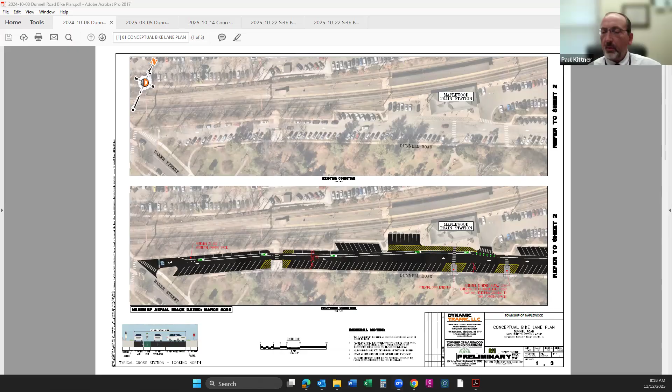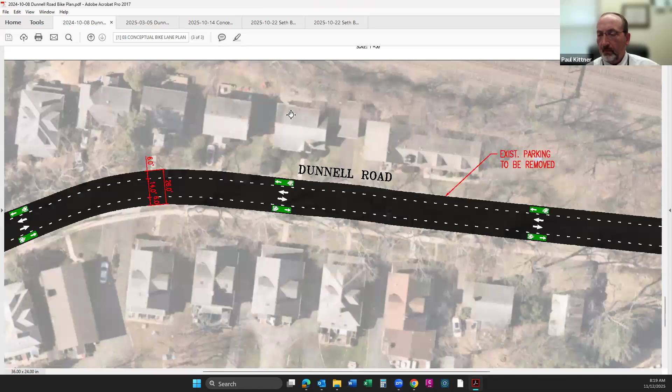Okay, here we go. So if there's a way we could zoom in on the proposed—maybe we can start where the Greenway ends at Jefferson. Maybe zoom back a little bit. Okay, so Dynamic had prepared these sketches.

What we're looking at is a bike lane that's defined, but it also encompasses the travel lane. This is not a typical type of striping situation. Pat can go into more detail, but the component of this is primarily the bike lane—this would not be, for example, a shared lane for walking. There is a sidewalk, not shown, on the easterly side of the road where we could enhance that and consider it part of the Greenway.

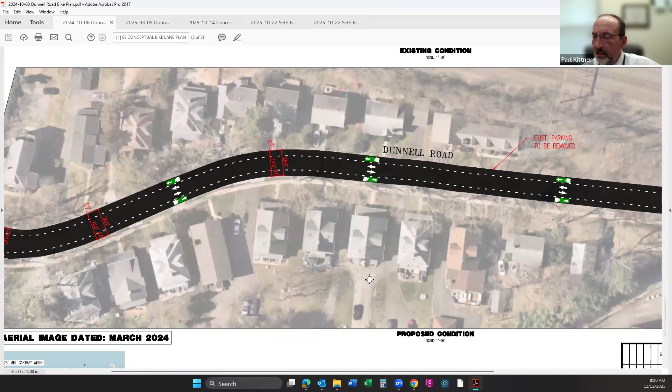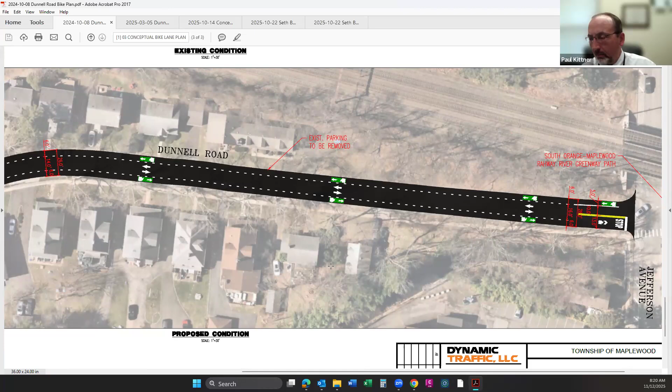Okay, we can enhance it. There's a number of ways to enhance that, but that's up for discussion, maybe at a later point. But the bike lane itself has two dedicated lanes, which would continue with the Greenway and continue this ability to bicycle. It's also worth noting we're in the middle of striping Parker Ave, which connects to Maplewood Ave, and our goal is to eventually connect an ability for a bicycle to get from Maplewood Ave down Jefferson and connect to this bike lane as well. So there's two different ways of doing it.

If you could flip to the next sheet, please.

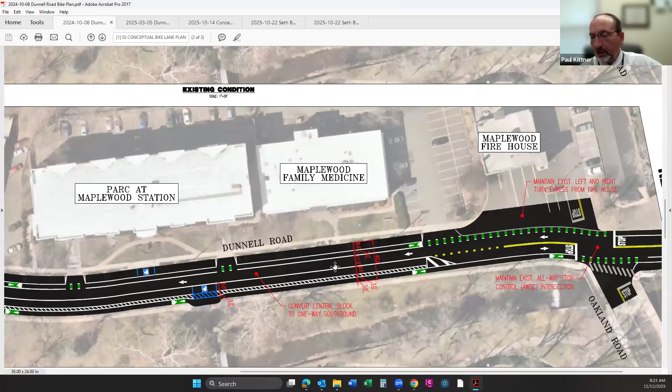So here at Oakland Road, what we're proposing is actually two-way circulation just at the intersection. That's to accommodate the firehouse station. We want the firehouse to be able to circulate in either direction from that location. But beyond that, traveling south, we're proposing a one-way circulation, towards the train station.

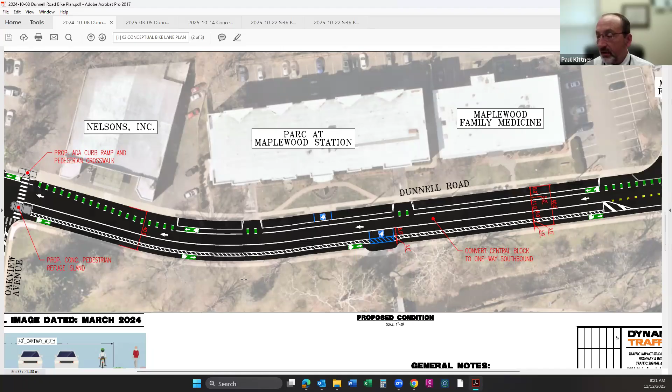Why are we doing this? Because there's no way to implement, with the road width that we have, two dedicated bike lanes while maintaining parking and the park facilities without making a significant impact to the park. So by eliminating one travel lane, we're introducing buffer areas and a dedicated bike lane, which would take up that space. This also promotes safer circulation.

Now you only have one way of traffic, and that would be consistent with the prior circulation pattern. So if you continue to Oakview, it's one way. Oakview to Baker is already one way. This is really the tricky part.

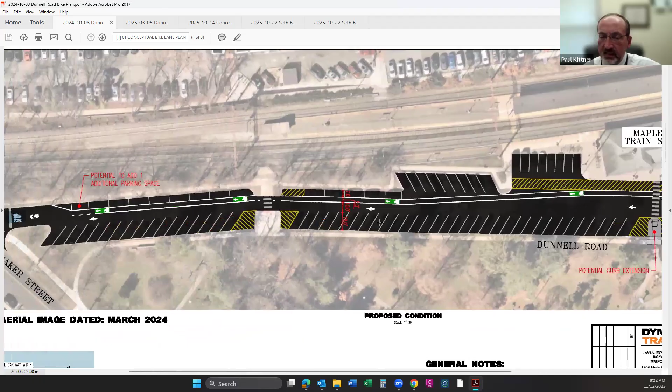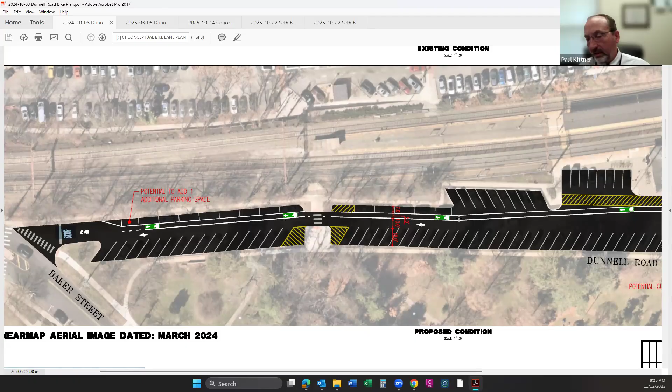The sketch right now shows a bike lane going in the southern direction. The problem is we haven't come up with a proper return going in the opposite direction for the bike lane. We have ideas, there's a number of ways we could do this. One consideration is to remove the 14 or 12 parallel parking spaces and shift that bike lane up against the curb, or introduce another bike lane.

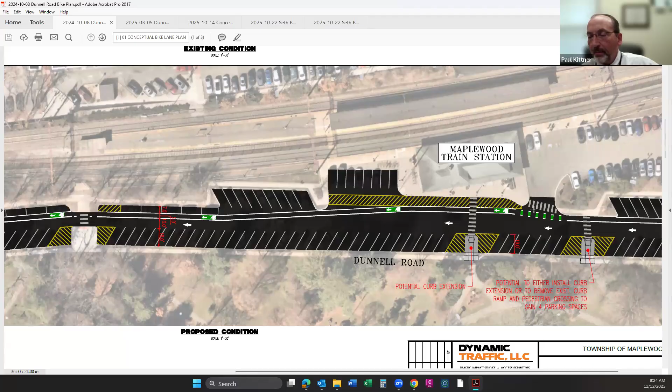So we have our traffic engineers, they might be able to provide some insight into that and explain that. But there is a second option that we have. Pat, is providing a two-way circulation bikeway possible if there's enough geometry in the road to accommodate the lane? I think going in the northern direction, it would be closest to the curb, so it would not be counter to the traffic flow. You'd have the buffer of the other lane.

Yeah, hi, good morning everybody. So yes, Paul, to answer your question, there are a number of alternatives we've come up with that could introduce a northbound bike facility, even though this block of the roadway is one-way southbound for vehicles only. To Ms. Adams' question, it's not a requirement since the block is one-way southbound for vehicles to begin with. So the plan you see here that only provides a southbound bike lane is a viable option.

We just wanted to present some other alternatives for what could be done to satisfy what is likely a demand that exists for northbound bicycle travel in this block as well, to reach the train station from Baker Street, even though vehicles can't necessarily do it. So it's not a requirement, but there are options that could be considered to provide it.

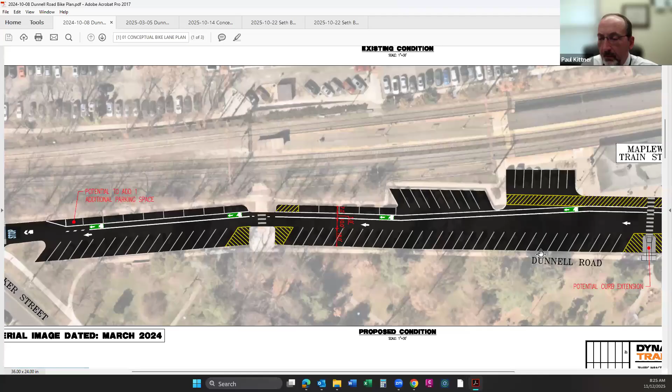So we did look at the option of encroaching into the park and widening the sidewalk. We actually looked at a number of ideas, and there is a potential for that, but the problem is we have a number of specimen trees along Dunnell in the park that really cannot be impacted. Mike could speak more to this on those trees, but they're significant historic trees. So we would have to be very careful if we were to shift either the curb or the sidewalk.

There is a possibility in certain locations where we could shift the curbing along Dunnell Road and basically shift that parking closer to the travelway. It's tight in the very beginning, closer to Baker Street, but as you go towards Oakview, the road actually widens. We just don't have a concept developed as of right now, but we can be sure to have that prepared for the next meeting.

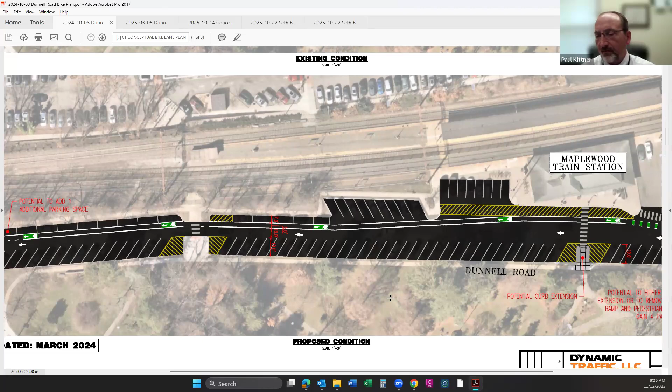We did walk the site, we did walk the park, and we were concerned with encroaching further closer to the trees with any curbing that could destroy root systems. So that's where we're at. I think we have to still refine this further, but this is, in my mind, the trickiest part.

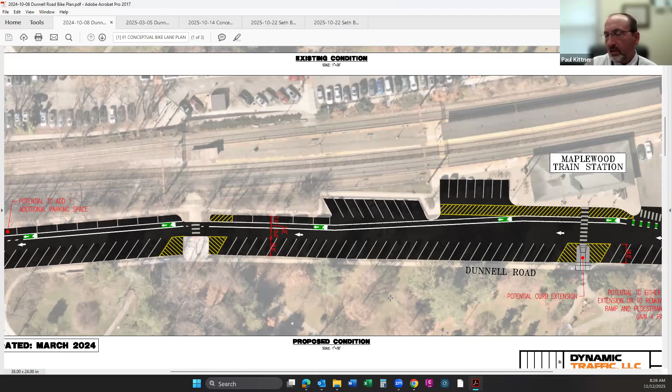All of this requires the section from Oakland to Oakview to be one way. And I think that's why our fire department official is on, to maybe voice some thoughts on that, if that's acceptable. So if we could just go back to that.

So Paul, just one other thing. The way you have it here, would people have access to the office parking lot here?

Two ways. If you came down Oakland, you can make a left there and then go into the parking lot of this office. Yes. Correct.

Deputy Chief, give us your thoughts on this section of Dunnell being one way. We also talked about making Jefferson one way going south towards the train station. Is that another option? Making Dunnell from Jefferson to Oakland one way? Yeah, we talked about that. There was a proposal or concept at one point. Is that still the only one I thought there was? This is new to me, the one way between Oakland and Oakview.

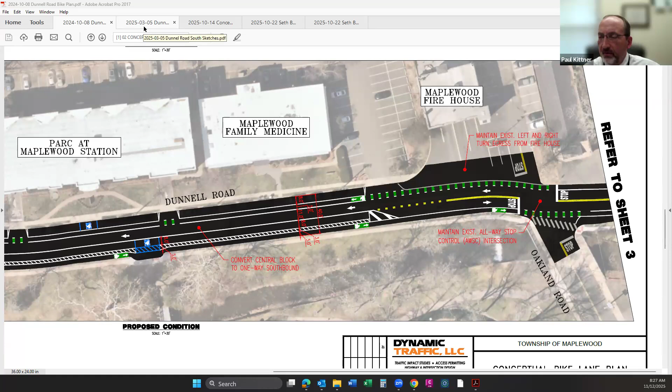Pat, I know you guys looked at this. Do you have any thoughts on Jefferson to Oakland Road, making it one way? Yeah, that was something we discussed very early on when we first started looking at this entire roadway. It was dismissed pretty clearly because we didn't want to cut off a route from the firehouse that currently exists. Right now there's easy northbound access from the firehouse to Jefferson. That would be eliminated under that scenario. So to avoid increasing response time, I think it was dismissed.

It makes, Deputy Chief, you have some thoughts? Good morning. Yeah, what Patrick just said, he explained it perfectly. Our main access to the upper part of Maplewood would be Jefferson, making the left out onto Jefferson and making our way up to the hillside. Making that a one way would obviously impede our access and increase response time.

As far as the front of the firehouse there, if it could stay two way, that would be really good for us. If you wanted it to be one way going towards the train station, that's fine, we'll still pull out and kind of go the wrong way a little bit onto Oakland Road if we have to. Having it two-way right there is not so critical to our operations because we can still go a little bit the wrong way onto Oakland. Yeah, it's kind of catty corner, but we can still go straight out. So if you wanted to make that one way, that's not a big concern for us.

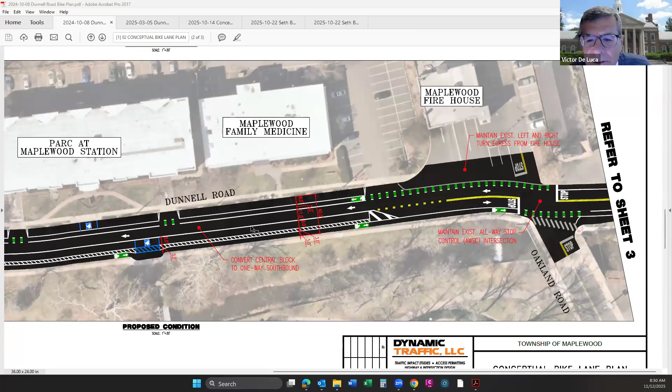Could you explain, I see we have the lane sizes, exactly what are we talking about between the firehouse and Oakland? Pat, Oakview, you want to talk, Mr. Downey? Yeah, so I can chime in on that.

So what we have here is one direction of vehicle travel in the center of the road where the white arrow is. That's the vehicle travel lane, southbound only, 11 feet wide. These individual dimensions could shift plus or minus, but in general this is just a conceptual layout. So we have that vehicle travel lane with the bike lane in the same southbound direction directly to its right, that's pretty typical. Then on the right side of the road, up against the mixed use development on the top, there's the parking lane, and to the left side there's also a parking lane. So while normally parallel parking is accessed to your right side as the driver, this one would be on your left, simply by nature of the road being one-way southbound. But since that parking existed and is high demand, we didn't want to impact that row of parking.

So that is maintained, just accessed from the opposite direction. And then the last thing you see at the bottom is the northbound bike lanes. In this block, unlike the southern block that Paul mentioned a moment ago, we do have sufficient width to maintain bidirectional cycle flow, even though vehicle travel is one way.

This is a little bit more critical lane in the sense that because it's going the opposite direction, or what we would call contraflow to the vehicles, it requires a little bit more safety enhancement. So that's why you see this direction has that buffer. It's a little bit less expected, perhaps, for a driver, for a cyclist to be going that way. It protects them from the doors of the vehicles, from that leftmost parking lane.

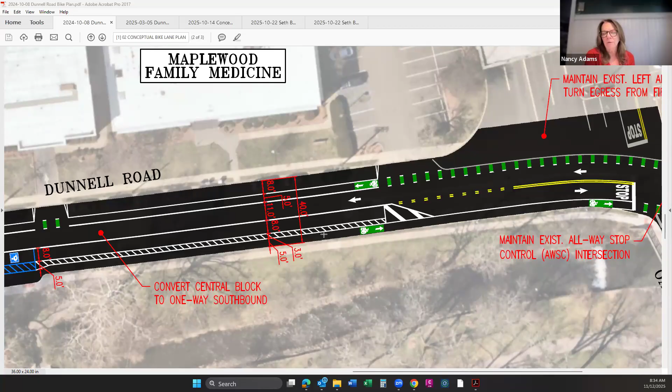So that protected lane with the bike coming the wrong direction is precisely what I was asking about on the other end, between Oakview and Baker. There, it's even less opportunity to protect it. But Mayor, to your point, that's one of the considerations when we make a final decision on how we orient these bike lanes. That should be considered.

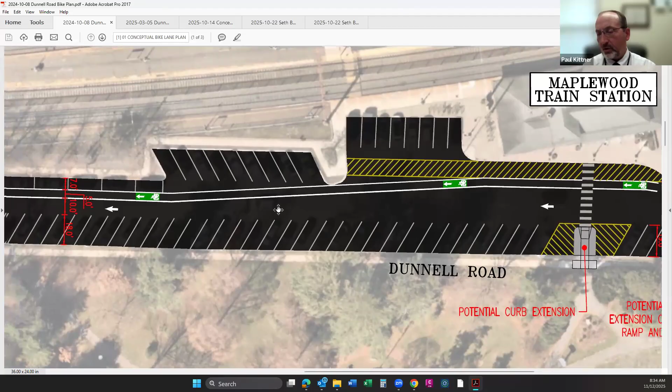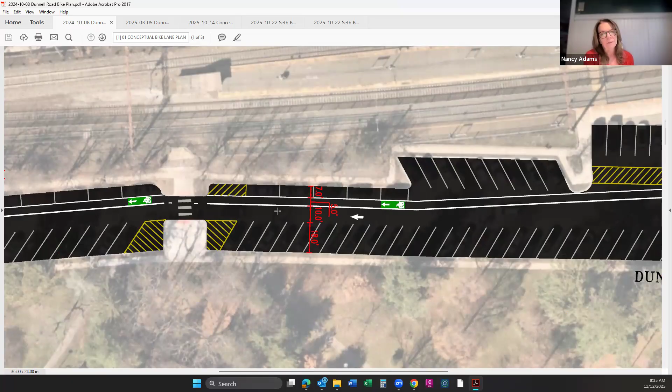Right, but losing parking over there, that's ginormous and problematic for a whole lot of reasons. Commuters, customers to the village, that's tough. I mentioned before the possibility of going into the park with an expanded walkway slash shared lane.

If we wanted to consider a wider sidewalk, Mr. Downey, how wide would that sidewalk have to be on the east side, along the park, to be shared? So for it to be a shared use path envisioned for cyclists going two ways on their bike at speed, concurrent with pedestrians on it, typically you would like to see at least a 10-foot shared use path. So about twice as wide as what's there currently.

There's also the potential for vehicle overhang to be considered, because there's that angled parking that comes up right to the curb. So the first 2 feet or so adjacent to that curb isn't really usable for what that 10-foot width would be, and there'd certainly be a grass strip anyway. Right, so you wouldn't be able to take credit for that grass strip in your 10 feet, so to speak. So it would be 10 feet moving closer toward the park.

If we used wheel stops there, can we take credit for it? Potentially, that's certainly an option to consider. There are maintenance considerations with those too, but yes, it's on the table.

Don't forget the historic park. You start taking part of the land, that's going to be an issue. That's another consideration, and that would take probably a big effort to do that. Ironically, it would take away the bike parking they just installed on the grass.

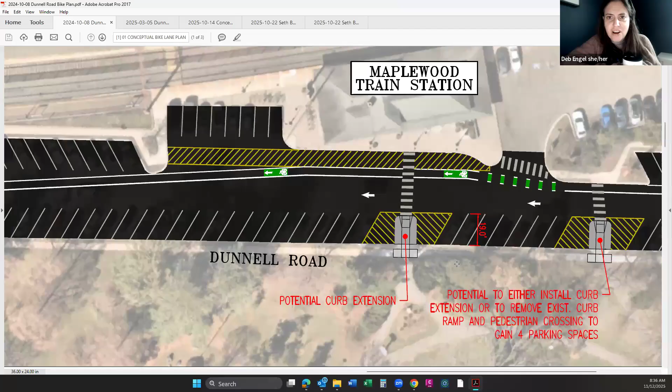Can you clarify a little bit, like which parking spots would go, and where they are, and how many?

Sure. So a couple of the different options we were kicking around would be those shared use paths on one side of the road or the other. That would be outside the current vehicle travel way, so that wouldn't impact parking.

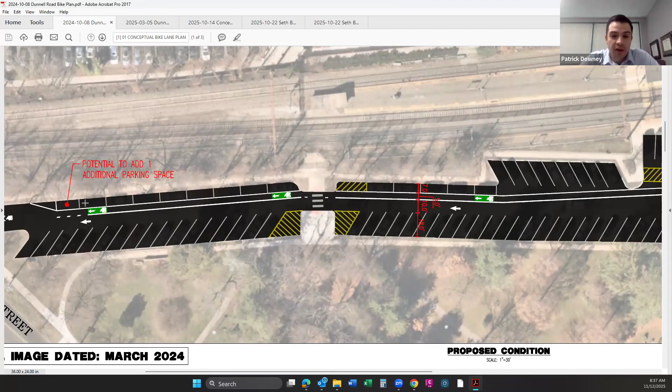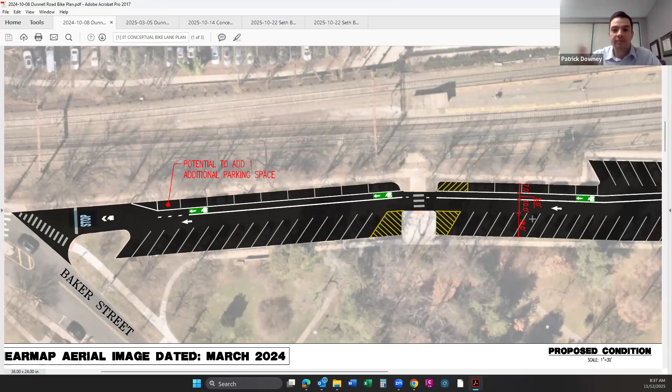However, the option that would keep it in the pavement would involve the 12 existing parallel parking spaces along the top of the page. Essentially, it would remove those, shifting the one bike lane you see closer to that direction into where that parking was, shifting the vehicle travel lane, the parking, everything to that side. So at the bottom of the page, you could put a protected northbound bike lane, similar to what you saw on the previous block.

And that would be along the curb, correct? Correct. And we have these curb extensions for the crosswalks to contend with—that would be in the way. So there would need to be modifications to those islands to allow the bikes to pass through.

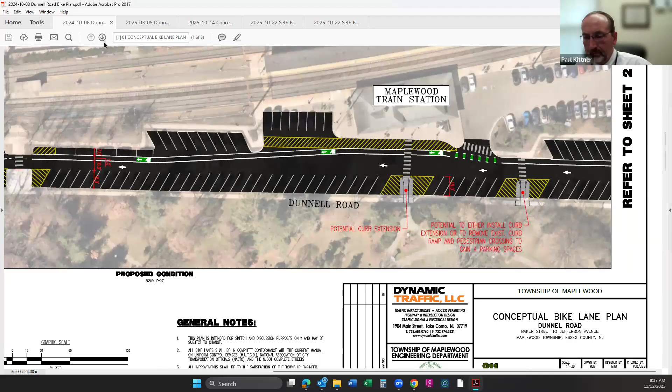So we'd be eliminating those parallel spots on the village side? Correct, yes, 12 spots.

That would mainly impact commuters, because in theory the village people don't park there to go shopping during the weekdays. We were looking at some other opportunities to maybe pick up a few spaces in other sections of this block. It would not be enough to offset that entire row, but the net loss would be something less than that total row.

Mr. Downey, if we were able to widen the sidewalk to a full 10 feet, is that also another consideration? I mean, that would keep the parking, right? We wouldn't impact the parking at all, and we could at least continue the bike lane in the northern direction.

Yeah, I mean if there's the ability to provide a two-way bike facility totally outside of the pavement, that's great—that's the most protected for cyclists. So that's definitely on the table, it's just a larger construction effort.

A lot of what we've seen, especially on the north block and the central block, was really just signing and striping—fairly inexpensive improvements. This is a real project.

If we were to install curb stops along that row of parking, then in theory we could take advantage of the grass strip, convert that to concrete. That would provide us a 6 to 7 foot wide sidewalk, and then we could go an extra 3 to 4 feet on the easterly end, widening it to a full 10 feet.

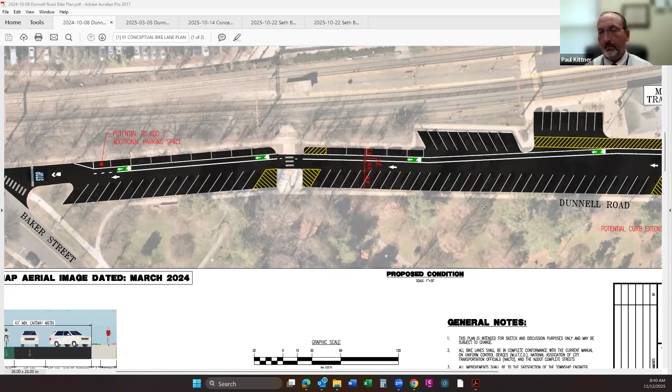Okay, so the major hangup here is from the train station south, correct? Yes. All right, so one option here is to phase this—figure out what we can do based on what we have and what's possible without a lot of construction work, and also the layers of approval once you start dealing with Memorial Park, so we might want to address this in phase 1, phase 2, because phase 1 can be done relatively quickly.

That requires parking changes by us and some redesign within curb to curb. That's correct, from Oakland to Oakview, you mean? Well, from Jefferson to the train station, essentially.

So we haven't talked about the reduction in parking on that section. But I don't think there is any, is there? Except on Jefferson, all the way at the end.

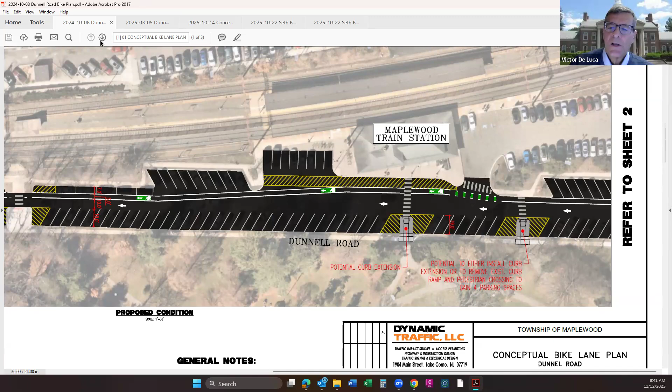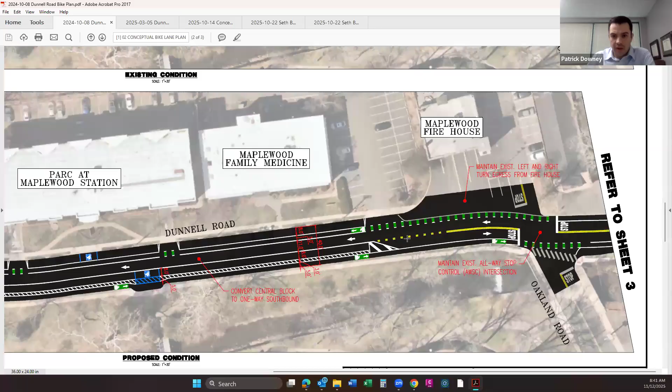No, I think there is—yeah, looks like it, so this northernmost block. One sheet further down, the next one, yeah.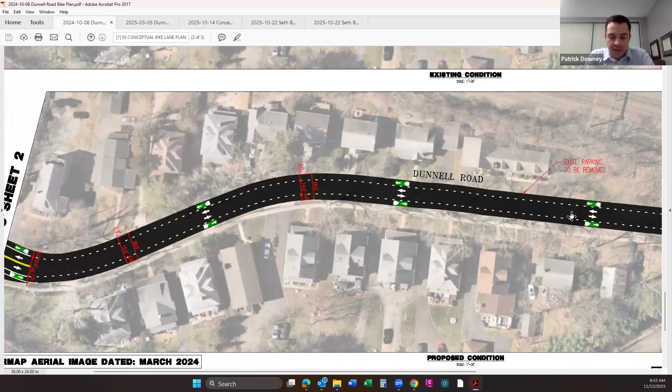So there's a mix of parking along one side of the road only here. The top side on this image, the southbound direction, has a mix of permit parking spaces and 2-hour parking spaces on school days, signed out there. So along the top side would be eliminated under this plan. And then there's commuter parking down at the corner of Jefferson and that first house. So how many spaces do we lose?

We don't have an itemized count because they're not individual spaces and there's driveways in there, so it's not a clean calculation. We could provide an estimated number, but I don't have that at the moment.

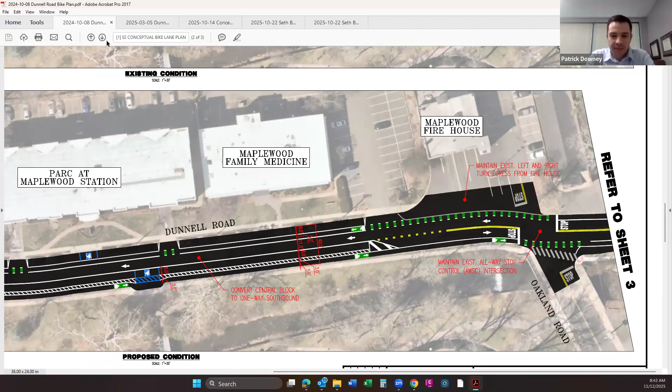Dave, can you go down to the corner of Jefferson there? So there's about 7 spots between that house and Jefferson that park on the train side. And those are commuters, permit commuter spots. So we would definitely lose those.

I just feel like it's worthwhile mentioning that if we make it safer for people to bike to the train station, less people might drive to the train station and need parking.

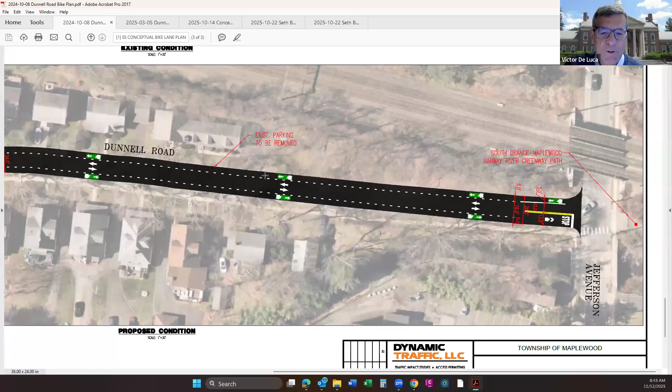So this section here, with the elimination of parking, there's enough road width to have 2 lanes with a bike lane on either side, correct? I'm gonna say yes to that with an asterisk.

So this has striped bike lanes along the 2 sides of the road. Because of the existing width of the road, which is fairly narrow, generally about 28 feet, and it actually pinches closer to 26 in some areas, there's not enough width to provide a center line down the road. So this is what's called advisory bike lanes, permitted by the FHWA as kind of a new trial basis measure.

It's akin to a good analogy, which is a residential street. When there's a residential street with parking on both sides, often what's left down the middle isn't enough for 2 cars to pass each other necessarily. The same would be true here. Instead of parked vehicles, it would be those bike lanes.

So in the scenario where vehicles are traveling both directions, one or both of them, assuming it's clear of bikes, will actually divert temporarily, partially into those bike lanes to pass each other, because there's only about a 16-foot section left down the middle. And this approach was approved through DOT, or is it under consideration?

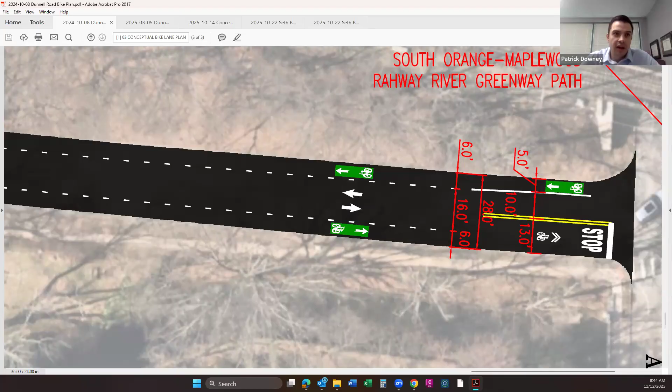Yeah, it's an approved measure. It hasn't quite made its way into the MUTCD, but it's well documented. It's been tried in other places, it seems pretty promising, it's just not fully adopted. It has restrictions along with it for speed and volume, to make sure you're not putting it in an inappropriate location, and this would be an appropriate location.

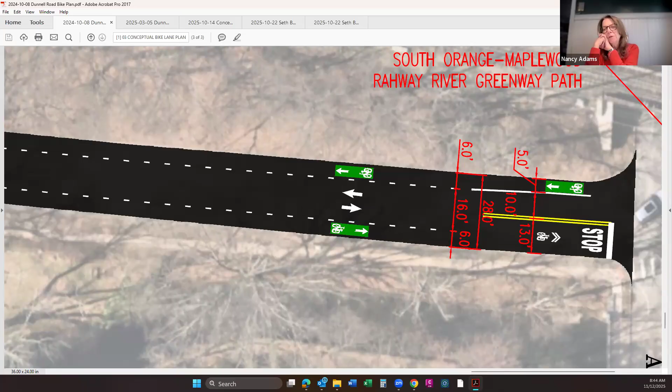It's sort of somewhere between a bike lane and no bike lanes at all, like sharrows, then this, then a full bike lane. Sharrows would be the alternative for a road of this width, and we think this is a little bit better because it puts a little more of the emphasis on the cyclist rather than on the vehicle.

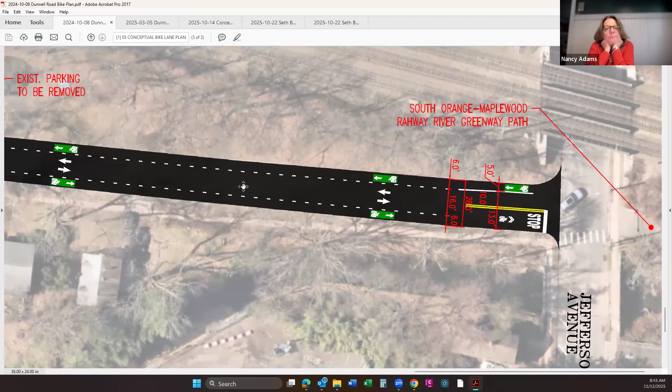So I would like to put forth that we focus on the area between Jefferson and the train station as the next leg. The reason being, as I mentioned before, it doesn't require construction outside the curbs.

It eliminates some commuter parking, some residential parking.

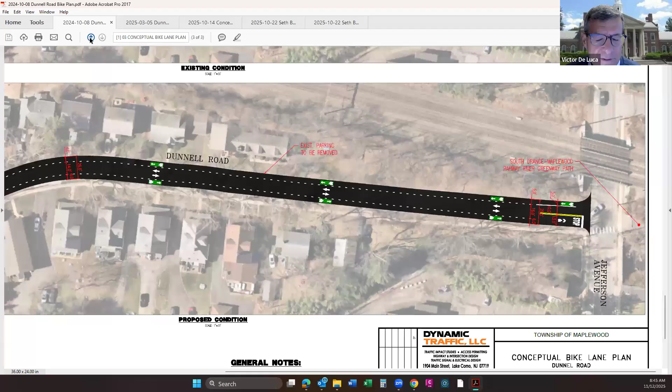And the way this design is now, if you go to the next slide Dave, it still allows access to that Maplewood Family Medicine office building there. It allows people to come out on Oakland, which is a signalized intersection with Valley, much safer than Jefferson. So I think this is a good design.

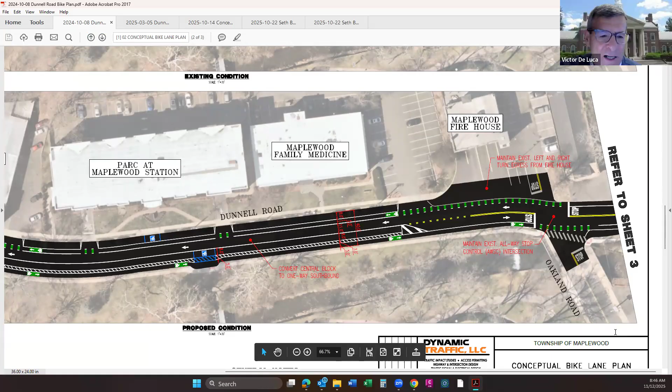The difficulty here is that the only access to the apartment building is to go around the block, past Maplewood, and Nelson's garage is the same thing. The only access to Nelson's will be coming down Dunnell.

And so there's a lot of buy-in here that we have to go out and get. I think there's enough work just to do this section, between the residents on Dunnell, the people who live in that apartment building, all those businesses that are in Nelson's.

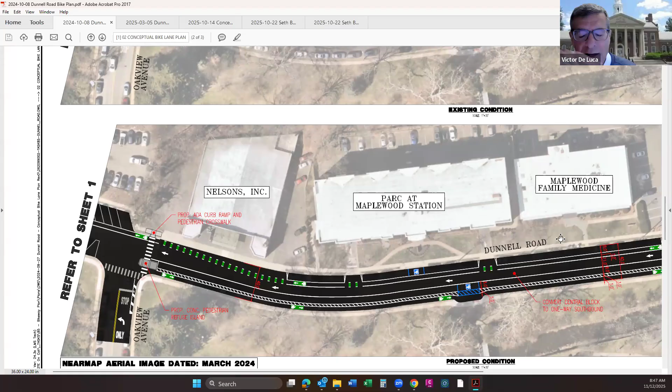Even the doctor's office there, because their clients are going to have to maneuver around to get into that office. And the Civic House with the Y. And the Civic House, yes, thank you.

Also, I thought when we asked Dynamic to look at traffic counts on Dunnell, it was between Oakland and Jefferson. I don't remember, did we do any of that analysis between Oakland and Oakview?

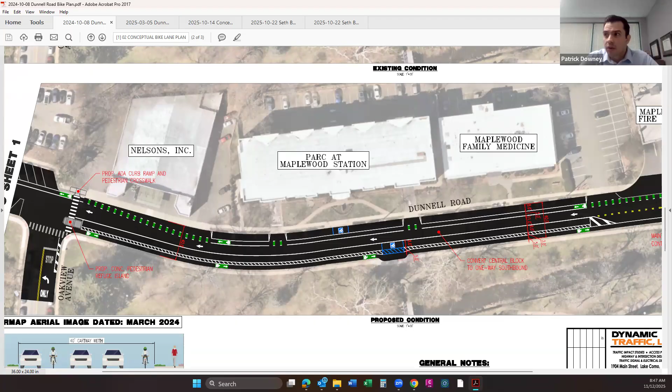So I could just chime in. We have a count at the intersection of Oakland and Dunnell, just off to the right of the page. What we were looking at was the northbound volume, essentially the volume that would be affected by this change, and it was fairly low. Peak hour volume was well under 100 peak hour vehicles, which is DOT's rough threshold for significance. So in terms of traffic impact of those redirected trips, it wouldn't really be perceptible on the adjacent roadway network. It's really going to just impact the people on this particular block.

What are the peak hours that you mentioned? Like what hours is that? I believe it was the typical morning and evening commuting hours, but I could get you more specifics or provide you the counts.

So Patrick, that was between Oakland and Jefferson? It was at this intersection that we're looking at, basically all of the turning movements at this particular all-way stop intersection. We looked at all the approaches, coming from the left of the page.

We've been talking about making this one way, Oakland to Oakview, for a while in these meetings, I feel like. No, I only remember it being one way from Jefferson. No, we talked about this from Oakland to Oakview being one way, right.

It's a heavy lift, but I would agree with what Mr. DeLuca is saying about focusing on this section to the train station. And I want to point out that even if we're just funneling people to the train station, we're also bringing them to the middle school, because it's just a very quick walk. If we have bike racks, you can park your bike there and walk over to the middle school safely. So I liked that proposal while we figure out what to do with the rest of it from the train station to Baker in the future. I'll go with that.

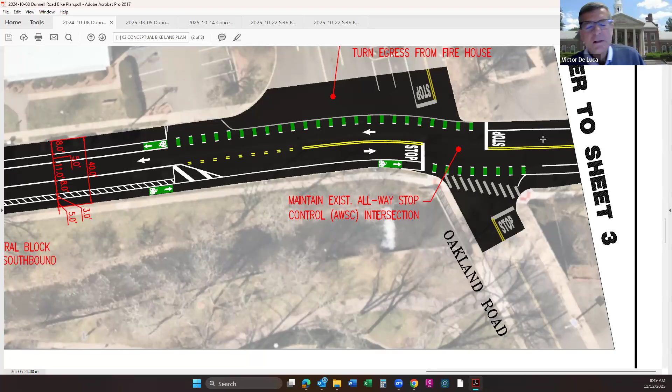So let's ask Mr. Kittner and the engineering team to focus a little bit more on this. And then we're going to have to lay out a strategy of public engagement. Once we know, it would be good to know if we're displacing any cars here. I don't think we are, but any parking in this section here — doesn't look like it, but it's hard to know.

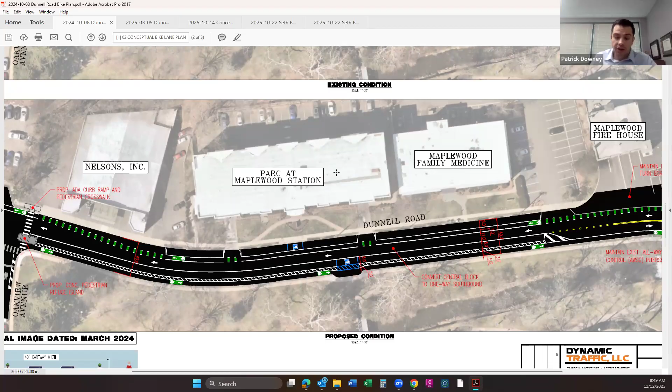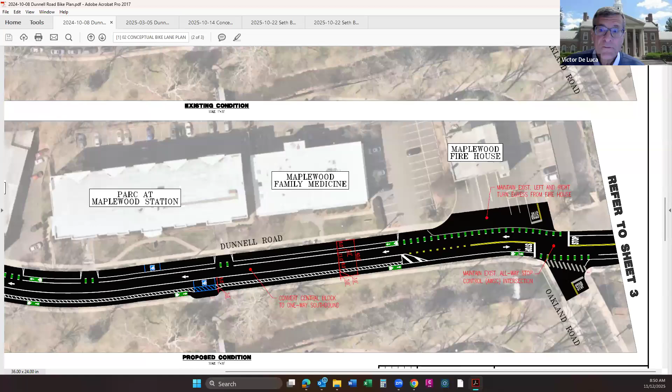It should be very close to a wash. I'll note that northbound section, just at the right edge, parking is generally prohibited anyway, with the big striped area opposite the firehouse. So ordinarily that might be a place we could lose some, but we're actually not under this plan because there's not parking there today. Right, okay. All right, so if we can, stop sharing, Dave?

If we could agree to that, we can keep that as our target for moving this along. I think I have agreement from our committee members, yes? Okay, Deputy Chief, do you have anything else you want to say about this, or you good?

You getting your bicycle ready? I'm ready, I'm ready to go. Deputy Chief — Vic keeps trying to promote you to chief. I've noticed that at SEFD meetings. Well, when the chief wasn't there, then he fills in. That's the only job. You're the only chief here. So I back up the chief when I need to.

All right, absolutely. Yeah, first I appreciate being here, because it will affect our operations a little bit, but like I said, I don't think it really impedes us too much. Having a two-way there is nice. The only thing I'll say is for that medical office building, it is a pretty busy building and we see it. The apartment building is not so busy. Nelson's is not as busy maybe as it used to be, but that medical building is pretty busy, so having a two-way there might make sense for the people going in and out all day. Just my two cents. But as far as our operations, as long as Dunnell out to Jefferson stays two-way, I think we'll be good.

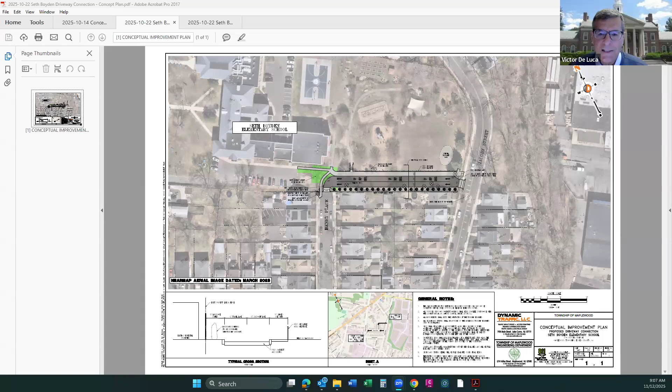We looked at a number of different ways to deal with drop-offs on the campus itself, and we've come up with this one. Do you want me to explain this, Mr. DeLuca? Yes, please.

All right, so as Mr. DeLuca said, we had a field meeting—a strong contingent of people who can make decisions for the school. After looking at the existing conditions, looking at the topography that is out there, looking at the structures, it seems as if a drop-off area between Jacoby and Henry Place should be considered for the school. And that's essentially what you see before you.

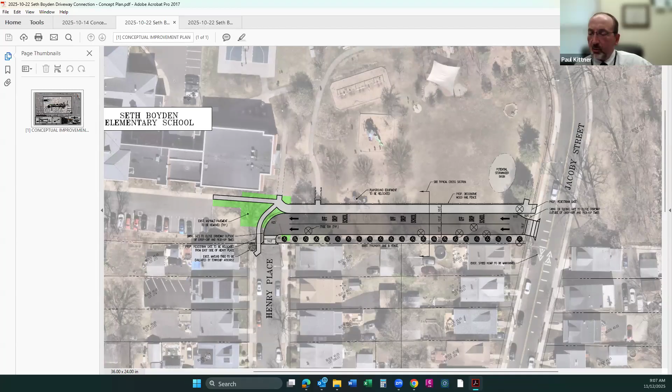Dave, can you zoom in a little more? Okay, thank you. So, Mr. Downey's here, they prepared the sketch, they can go into some detail. But in essence, our thought was if we're able to make a connection point between Jacoby and exit vehicles and Henry Place, there's a significant grade difference just to the left of the drawing. That avoids major construction there, major grading. There are some impacts to this design.

There's a playground facility, swings and whatnot, that would be impacted and would have to be moved. Mike, you had looked into some of these costs and this effort, you could maybe talk about that briefly. There are also some trees, probably 10 years old or so, that would have to come out and get removed. That would be followed up with some plantings along the property line shared with the residential houses.

But we envision two lanes. Right now we have it drawn as 12-foot lanes. Mr. Downey or Mr. McCormick, do you think the 12-foot lanes are necessary? Is that something we could consider reducing to maybe 10-foot lanes, if we had to, just to reduce the impact to the school? Yeah, I think there's certainly room to adjust really all the dimensions on this plan.

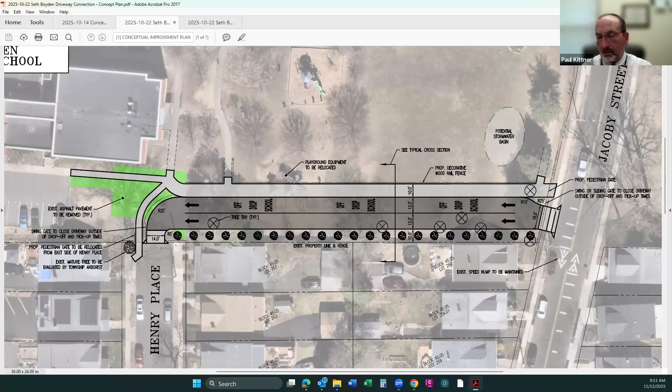Mr. Downey, do you want to add anything else? No, I think you provided a great introduction. I think the spirit of what this improvement is trying to accomplish, just for everybody's reference, is to bring an activity that's a little bit messy and hectic out on the public roadways, particularly on Boyden, into the school property, making it safer and more orderly. So that's the goal this is trying to accomplish. But it is a large project also, so that has to be weighed hand in hand on the township's end.

Deborah? So it looks very car focused. I'm just thinking we talk about bike lanes or we talk about kids - how do kids bike to Seth Boyden? Because Boyden is not really safe. So I just feel like if we're doing a new drop-off design, we want to consider the bike network plan and how we get kids to bike to school.

I can respond for this plan particularly - that's the intent of the very wide sidewalk area you see there that's 10 feet wide on the top side. Really to not have the bikes even in the pavement, they would be fully separated up, above the curb, away from the vehicles. So that would be like a bike lane - I would call it essentially a shared use path, a wide area for both pedestrians and cyclists.

But the limits of this improvement we're looking at are the property itself. It's not necessarily touching on bike lanes on the adjacent roads. Not that it couldn't be done, it's just not part of this effort.

Is Jacoby Street part of our bike network plan that was considered? Do you recall? I don't recall, but as the conversation continues, I can check and let you know. All right, was Boyden part of that bike network? I think Boyden almost certainly was.

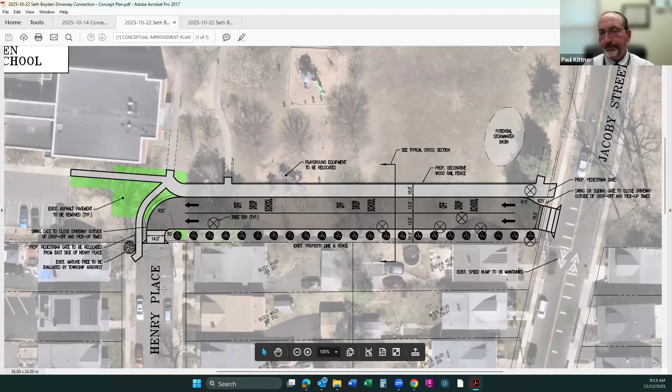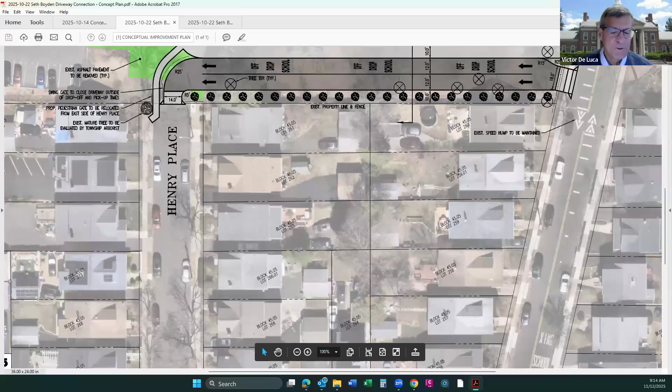Now, this does impact our residents because we're now dropping off a lot more cars onto Henry Place in a short period of time. They're going to - I don't know, can you show Brown there? I don't think Brown's on the map. So they're going to come down Henry and then make a left or a right on Brown, so there's going to be additional traffic on Brown itself.

And it's going to get backed up because it's hard to make a left off of Brown over there onto Boyden. Although I see we have arrows there - right now, Brown is not one way, and I'm not sure we want to make it one way, but that's something to talk about.

We have not presented this to the school yet because we wanted to bring it here first. This would be a school expense, but because of the impact on the residents, we wanted to test it here first, and then share it with the school.

Did you guys talk about this kind of traffic plan at that meeting? Were they like, oh, that's a good idea to do it in the back, or is this just a new concept? No, this is actually the one that we all kind of settled on.

And you just said the school budget has to pay for it. Or the district. Would we split it or something? I don't think the school district is gonna have money to do this kind of project. Well, I don't know if we have money to do it either. So either way, it's taxpayer money.

But yeah, I have a lot of concerns about the residents over there. I know they've been frustrated for years anyway with parking over there and the confusion that happened. So I don't know if this would be better or worse.

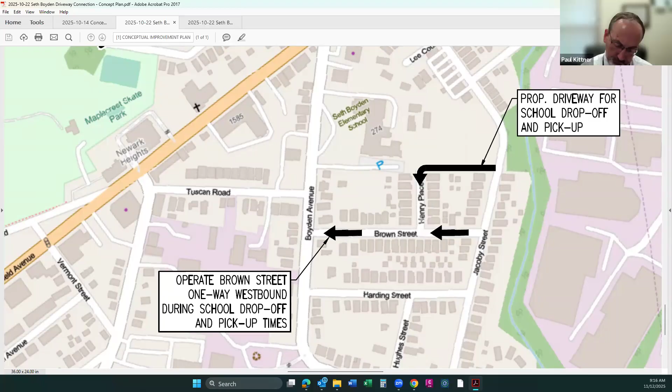We're really still at the conceptual stage. This would take a lot more conversation with everyone, but right now what we have is just not sustainable. Dumping all those cars and getting people dropping off in front of the school is just not working.

So when would, I mean, it feels like we do need to talk to the people on Henry Place and Brown Street. Would that happen concurrently with talking to the school district? Well, I think the first step would be to give it to the school district with sort of a ballpark to see if they're even interested in having that second conversation.

And if anyone from Henry Place or Brown Street is watching this meeting or hears about this or it still comes up somewhere, they can reach out.

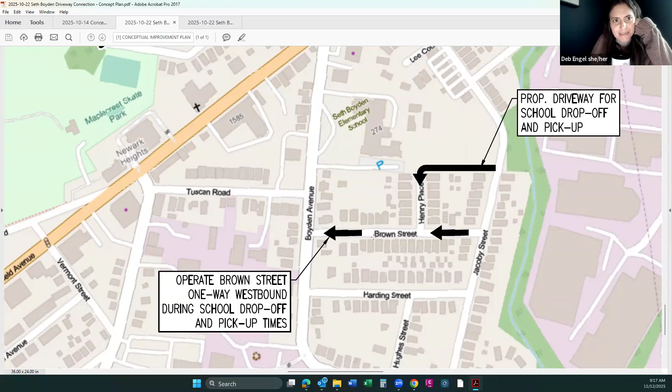It's right now just conceptual. So right now people are using Brown Street to drop off their kids and park their cars. This may actually help because we're going to be creating a parallel road that is designed for drop-offs. It doesn't have curb cuts, doesn't have driveway entrances.

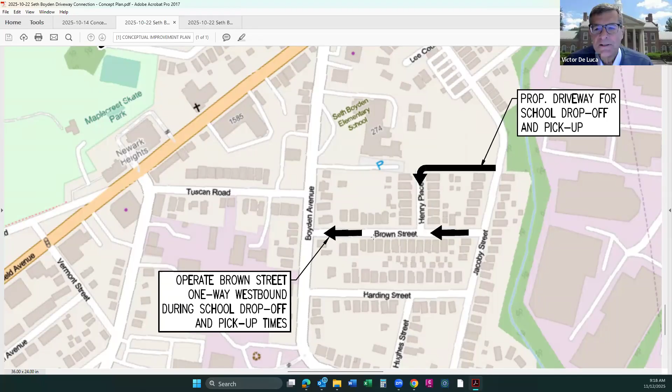So I don't know how many cars we can fit. Have you figured that out, Paul or Patrick Downey, as to how many cars can actually fit on this drop-off queue? Not specifically. I think another thing to consider too is whether or not this would ever potentially need to accommodate a bus or not. Currently it's really envisioned for passenger cars.

Yeah, I think that's it. The buses are covered by the driveway in the front.

Just taking a quick measurement here. Well, rough and dirty measures, we're looking at 6 to 8 cars at a time for drop off. I was thinking 8 cars, yeah, I think it's even a little bit more than that, maybe 8 to 10 based on that length with that right curb line.

So I think you can move a lot of cars there. Yeah, it's a pretty good length for that type of operation. And having the bypass lane allows people to do that.

One thing that works out well here, just in terms of the geometry, is the most desirable location is all the way at the front of the line, closest to the school. It's often a challenge when the most desirable location is somewhere earlier, because then people don't use the full length of the curb line, they never go past spot number one. Here, we would get full use of that full curb line, which would be pretty efficient.

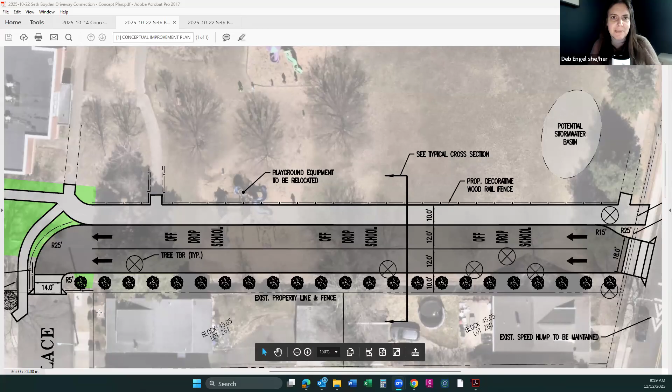Going back to Brown and Henry, and you were just talking about maybe parking restrictions during early hours or whatever, we just passed the overnight parking and there's 2-family housing in that area too. So I just think we need to be mindful of the people who might be parking on those streets overnight.

Yeah, there's enough, so maybe we do it one side of the street, so anyone who has overnight parking parks on that side. I think it's really just looking at Henry Place.

But I think we're far from any of this. This is going to take a while. Knowing how the school works, even if they agree to this, they would have to find the resources to do it. It's going to be a cost-benefit analysis for them.

Well, I'm in favor of you moving forward and continuing conversations if that's what you're looking for. Yeah, that's what I was about to ask, is it okay we can release this to the school? I just think in the language you should talk about it, because I feel like it's going to get out there somewhere and people are going to hear about it. So we should say we're going to talk to residents, get ahead of it before they're saying we're talking about all this stuff and not even considering them.

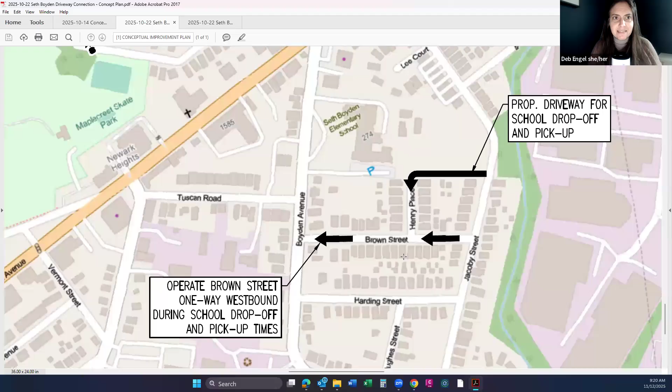Okay, can we go to the next one, the daylighting of Tuscan Road and Boyden Avenue?

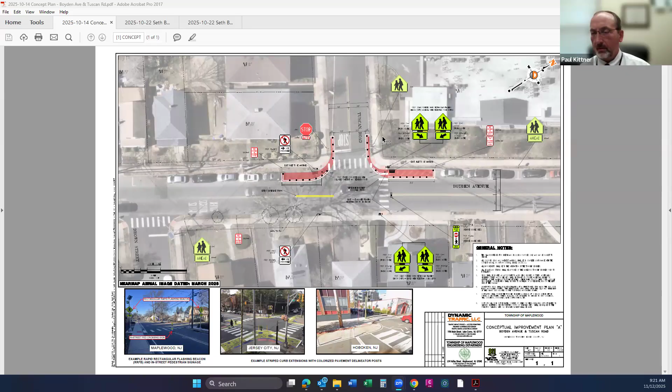Do you want me to talk about this, Mr. DeLuca? Okay, so a couple years back, we made pretty significant improvements to this intersection. We restricted some parking near the intersection of Tuscan. We moved the crosswalk from the south side to the north side where it is now, as shown. We also moved the push button head signs that were blinkers. And at the time, we had put in-street pedestrian signage.

But the thought was to try to enhance this and provide more safety improvements to this intersection, and that's the sketch you see before you. So what we envision is basically bump outs delineated with a bollard structure, for example, and colorized pavement. It gives a visual to the drivers and provides some refuge for children and the crossing guard to gather while planning to cross. It also squeezes the lanes a little more, providing emphasis with physical barriers to slow cars down, since in the past cars still go through this intersection pretty quickly. So that would be addressed.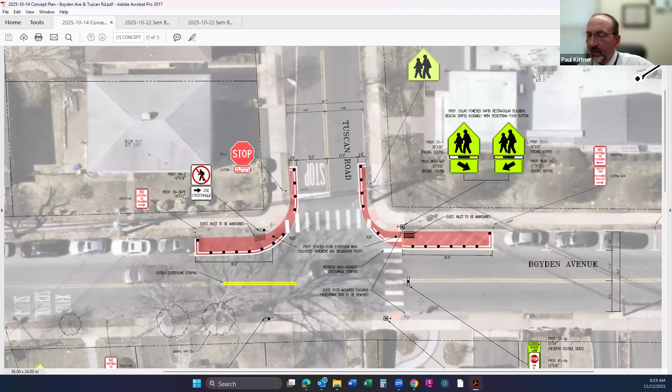The good thing about this is that I don't think there are any drainage improvements required, because we're not putting in physical curb bump outs here. It's simply striped, and there are examples at the bottom of this drawing of different locations where it was implemented. Upgrading to a rapid flashing beacon would also catch a driver's attention, which is a significant safety improvement. I think the combination of all these improvements would enhance the safety of this intersection.

Thoughts, anyone? So it's not concrete, it's just bollards and striping? Is that what you just said? Bollard striping and colorized pavement and the rapid flashing beacon, yes. Because Tuscan Road is on the bike network plan, right? So I just want to make sure.

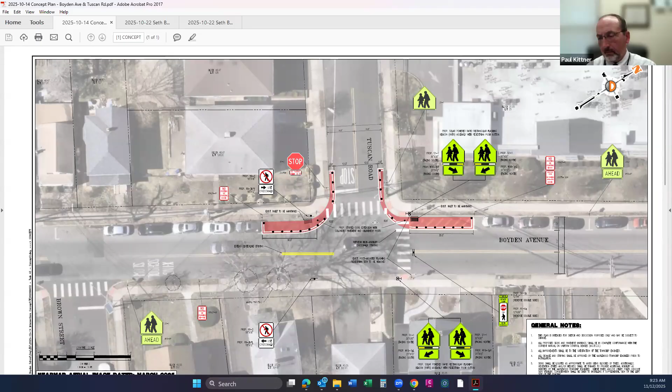Mr. Downey? Yeah, so actually if you can pan a little bit down on the page, Dave, just to see some of those examples that might help illustrate it. It's trying to get all the benefits of the bump outs without some of the drawbacks, because once you introduce new raised curbs, it's a little bit more committal. You're pinching the road, and it also impacts existing drainage patterns in those gutters. So it can really add up in cost when you need to move inlets, shift drainage pipes, things like that. This doesn't interrupt any of that existing drainage pattern.

It just provides the additional pedestrian safety in the form of something a little bit more decorative. We showed it as red in the main view above, just to illustrate that it would be colorized in some form or fashion. That could be whatever type of color or design the township would desire.

Is the color of that bump out regulated? Do we have flexibility there? Very good question, you'd get a different answer depending on who you ask. Certainly in New Jersey it's become fairly common, as you can see in this example, to make them decorative elements, sometimes getting enhanced community engagement to make a project out of it, some type of art piece or something school related. So there's a lot of precedent in New Jersey for doing more decorative elements like that. That's what I'd be interested in, working with the South Boyden School community to maybe do something.

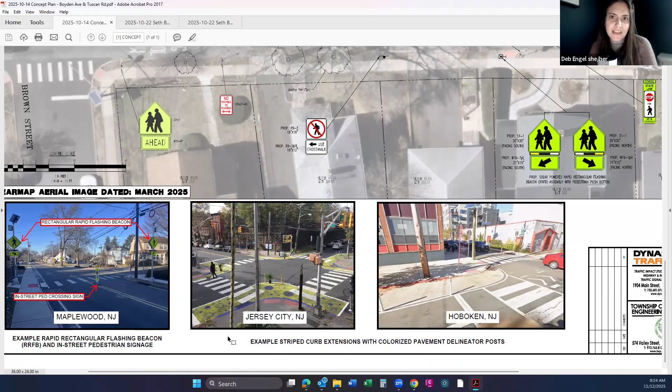So let's go back to the intersection picture, Dave. I'd be interested in doing some daylighting here. Is this something you would include in your 2026 budget? Yes.

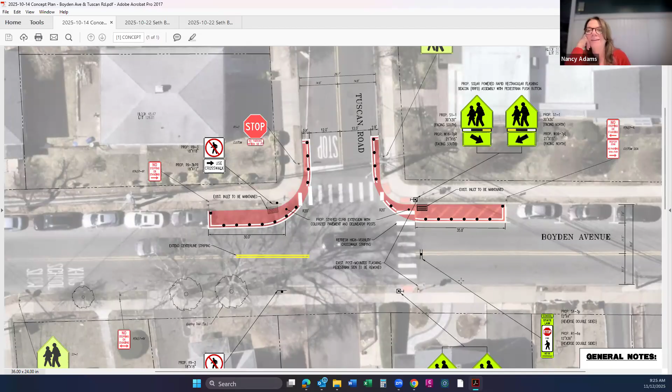I still think there's a lot of stuff going on here, and to the degree that we can make this a better intersection for crossing, we're going to improve pedestrian walking and the safety of that. So I agree, I'm for it. Mayor, you got any thoughts? No, I like it, I like doing something decorative and fun at that school, that would be nice. Not like Jersey City's, but you know. All right, so let's keep this on the drawing board and move forward with some ideas.

What about the replacement of the quick curb up at the top of the street that was taken out for the paving? We reached out to the manager of the project, Amalia Farrow, and he's represented to us that he's working with Straight Edge on getting that replaced, and that should be done in the near future. This has been something we've been trying to get done for quite some time, it's not from a lack of trying. Many contractors are famous for getting to the 95th percent mark on a project, and then the last 5% takes forever to actually finish it and get it implemented. So it's always a tug of war, but we'll get that addressed one way or the other.

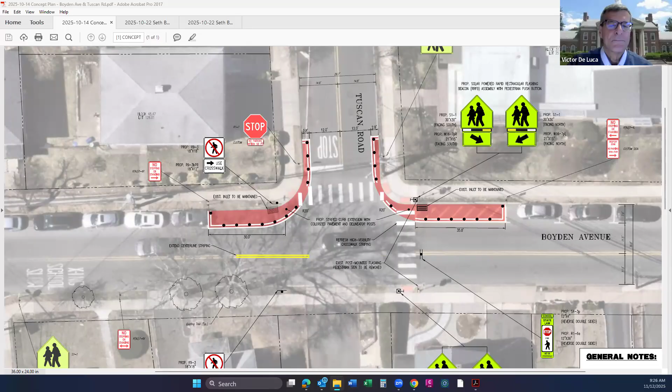Let's just go down these other things real quick, Paul. Colgate and Tuscan crosswalk, we're going to build that in the 2026 budget. The high intensity lights at Tuscan and Oakland, did we say we were putting them in there behind the library? Yes, we talked about that, and that's also a '26 budget item. And the Jacoby and Boyden Avenue high intensity lights? We actually incorporated that in the traffic calming, so we're looking at getting that done in the next two weeks, they'll be implemented.

On election day I was approached by a number of people about that. We're still having people coming up the hill from Stuyvesant, they come up very fast, they get to that curve at Menzel. People are having a difficult time pulling out of Jacoby Street. So we need to put that back on our thoughts as to how we can do some traffic calming there. We'll certainly look at that.

The other thing is people are still concerned about folks on Burnett when they get to Rutgers, they're not stopping. The suggestion was, what's the possibility of putting a four-way red blinking light there? I think we have two now on the Rutgers approaches, but we could add two on the Burnett approaches. I meant the overhead one. Oh, overhead, yeah, well we could build that into the budget. That's a more sizable cost, you're talking about a foundation, running electric, and the arm itself.